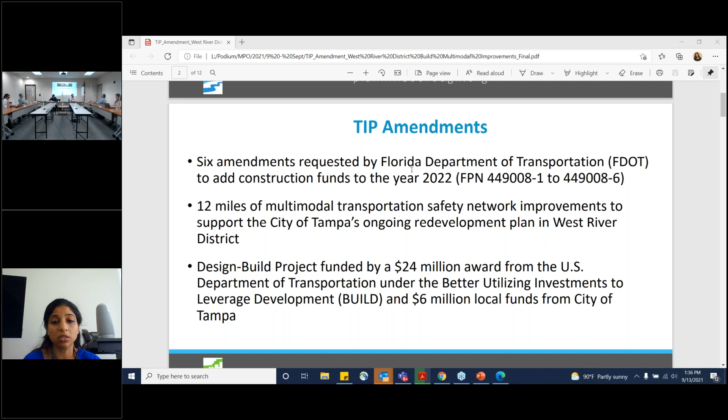I would just like to note that this was awarded as a grant back in 2020, which was a U.S. Department of Transportation BUILD grant. The amount which was granted was $24 million. There is an additional 20% local match, which will be provided by the city of Tampa. So in total, the construction cost is about $30 million, and it will be designed as a design-build project.

I would just like to give you a quick update about the project location. As you can see here in the map, this covers the western side of the river. The project is in different phases, as you can see, 1 to 6, and by that it means that the different phases are the different segments of the West River Walk. This project will help to complete the sidewalk gaps and complete the network.

So I will just go over quickly which are the roads. This mainly covers Rome Avenue, West River Walk, Platt Street, Ridgewood Park, and Columbus Drive. So these are the main corridors that will be included in the construction.

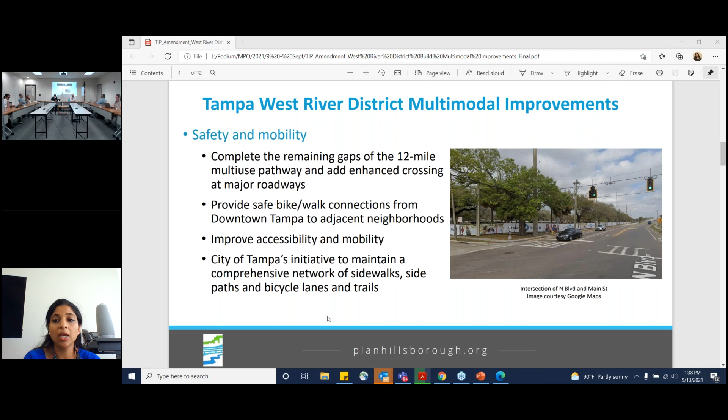Now I would like to go over some of the benefits of this Riverwalk development project. I would like to highlight that this project was mainly meant for the safety and mobility of the people. As I had mentioned before, it would help to complete the gaps of the 12-mile multi-use pathway, thereby creating a separate pathway for bicycles and people separated from vehicular traffic, and it will also add enhanced crossings at some of the major roadways.

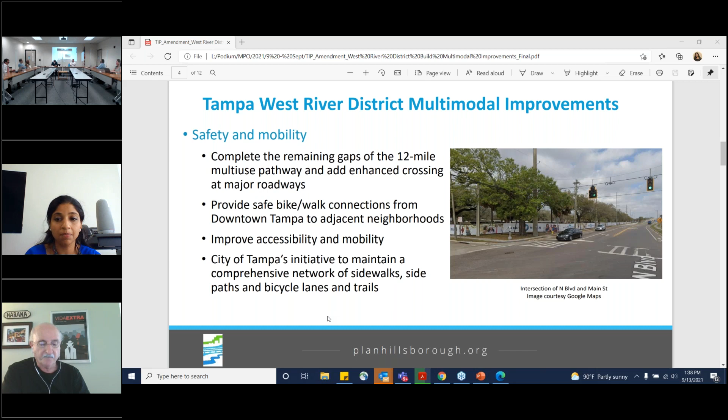This will also provide a safe bike-walk network in this neighborhood, improving accessibility and mobility. This is part of the City of Tampa's initiative to maintain a comprehensive network of sidewalks. There's a map on the right, a Google Map shot I picked up, and I see some sections of the Riverwalk are already being built here. So this will go into that project.

Another important advantage of this project is that it will help build economic growth and provide resilience in the community. Through this grant, once the Riverwalk is completed, it will help bring in more jobs, connect jobs and residences in the area, and increase investment into the opportunity zones. It will also provide a long-term sustainable transportation option, reducing greenhouse gases and giving people an additional mode of walking and biking, improving health and overall air quality.

The design is also such that it will help increase seawall resiliency and mitigate stormwater runoff through living shorelines.

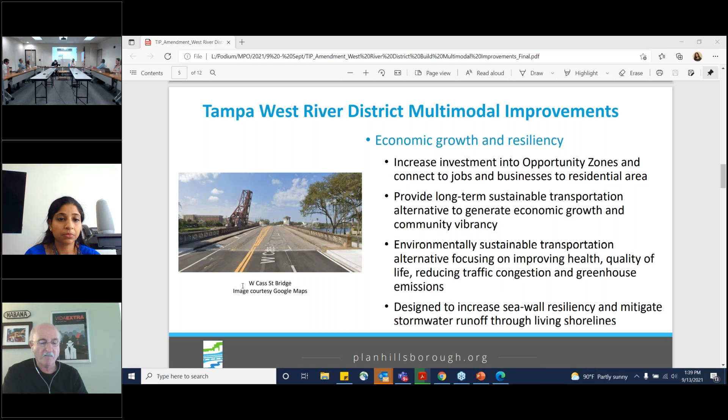I'd just like to give you another quick update about the public involvement. This is a City of Tampa project, but we are just facilitating the amendment process for it to report to FDOT, so most of the public involvement has been happening through the City of Tampa. I believe we have a City of Tampa staff here, but since the grant was awarded back in 2020, they have reached out to the West River District CRA, the Hillsborough River Interlocal Planning Board, Friends of the Riverwalk, and presentations in front of the board, the TPO committees, and other local agencies are some of the other public involvement the city is undergoing.

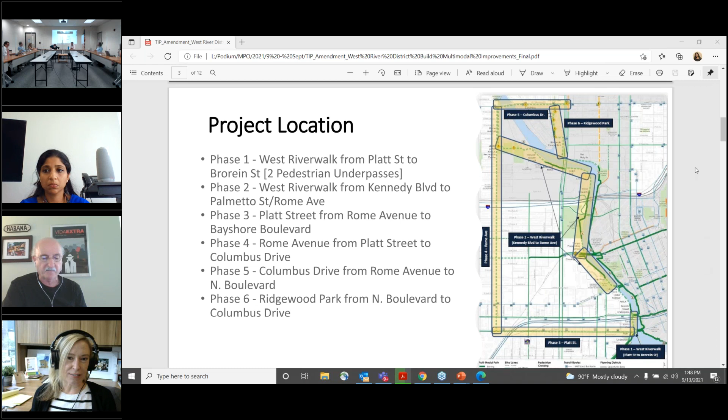As you know, we're at the early stages of concept development and cost estimating. I wanted to preface what I'm about to say with this: this is going to be the 24 million that we received from the BUILD grant from Federal Highway Administration. It's a construction project costing about 30 million.

These segments, not really phases, that you see here - the one Justin was asking about is segment 4, on Rome Avenue. It does include, if you see, it goes underneath the interstate and then all the way down to Rome Avenue.

Am I saying that correctly? Yes. So I think his question was already answered from reviewing this map. I don't know, Justin, if you had anything to follow up with in the chat. I'm good, thanks. I spotted it after I typed it. Okay, awesome, good, thanks. We appreciate the input though.

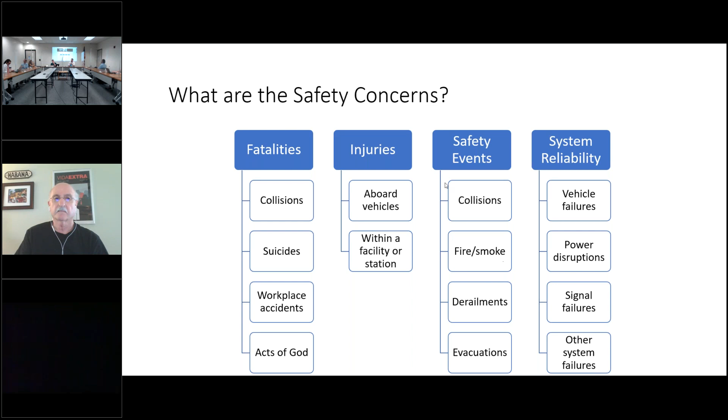I would just like to explain to you the process and schedule for PTASP target setting. There are 3 stages, and MAP-21 originally established the targets in July 2018. It's been over 3 years that we knew we had to adopt it, and it was scheduled to be adopted in July 2019. That was the original intent.

But due to COVID and some other factors, they were also resetting their targets and reiterating some of their measures. That led to such a long delay. And this year we will be adopting it.

So between now and then, the state should have adopted the PTASP target. Unfortunately, the state hasn't adopted it yet, but we do hear that September 30th is the final deadline, which is kind of late in the year, but hopefully from next year onwards we will be adopting it much earlier. So in this process, the MPO and the TPOs must adopt the safety target by September 30, and we will be using that as the year 2021 targets.

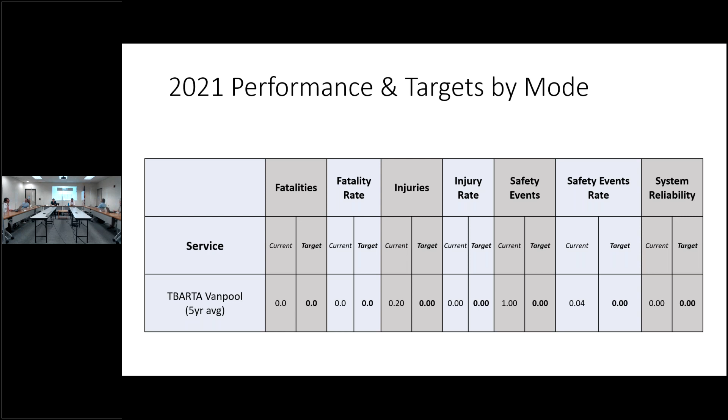With this, I move on to explain the next steps: to adopt the numbers presented today. If the board approves this number tomorrow, we would like to keep this number and report it to FDOT to be transmitted to FHWA. We also would like to develop a performance methodology, as I mentioned before, to evaluate the impacts, and adopt a process that can be incorporated into the TIP and the LRTP in the coming years. That would be the hope for today's presentation. I would request you to approve these safety targets.

If you have any questions, I can take them now. Thank you.

Okay, Vishaka, do we have any questions from the committee?

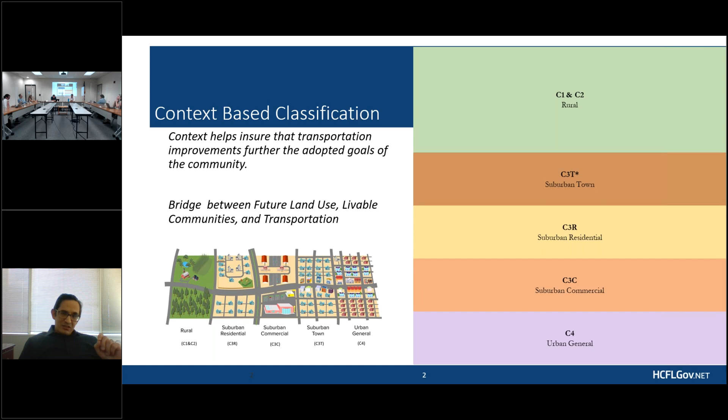But we can't really take the complete streets context-based classification system as far as it naturally should be taken with the resolution of a comprehensive plan. In a comprehensive plan, we can know whether something's rural, suburban, or urban. But what we can't know is whether that rural thing is planned to be a rural activity center, like a crossroads with a school and a church and a corner store, a rural neighborhood, or what we normally think of as rural, like farms and preservation areas.

And then with the suburban, we can't know whether or not a suburban residential area in the comprehensive plan is going to be served by more of a simple suburban residential road with a lot of residential driveways on it. These are your older collectors in the community. Or one of the more post-war suburban neighborhood connector roads that basically serves as a feeder to all the local neighborhood streets. Same thing with urban areas.

You can't really know if it's a main street or an urban area neighborhood through the resolution of the comp plan. So the Complete Streets Guidebook refines that comprehensive plan context-based classification and gives the ultimate designer of the road the ability to understand what it's going to be in the future. I'll give you an example of how this is actually played out by looking at an area in Ruskin on the next slide.

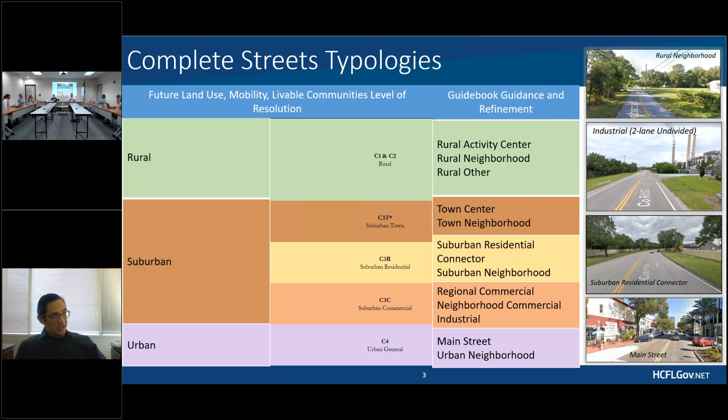So this is the Home Depot on the corner of 674 and I-75. If you guys haven't been, there's a great German restaurant in that shopping center. I hope it's still open. So this all has, if we click through to the next thing, it all has the same land use.

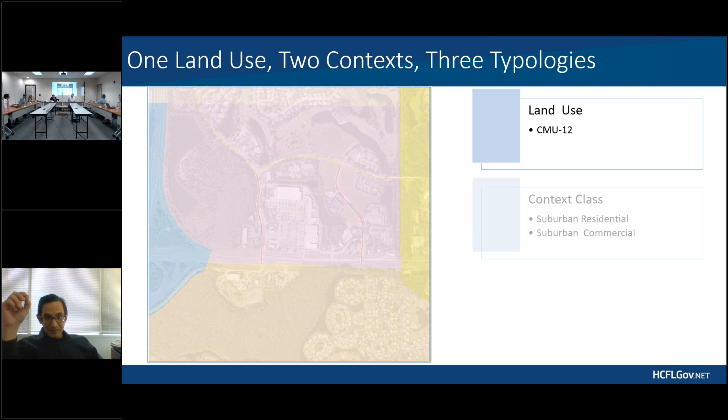It's CMU 12. And if you look at the functionally classified roadways in there and assign them a context classification, if we click to the next thing, you can know that one of those roads going through there is suburban residential, and two of them are suburban commercial. Then there's all kinds of other things you can look at in terms of the CMU 12 and know that it's suburban and not urban because of the way growth is planned in the area, but that's a longer story. And then, but what type of suburban commercial is that?

Suburban residential, you can see it's a classic suburban connector, but the suburban commercial, there are two different things going on there. One, when you're closer to I-75, that road on the left is a regional commercial road. That's the Home Depot. It's the big box shopping center that's serving a huge market area. The road on the right, further from I-75, is a neighborhood commercial road. What you see on that road are small, basically dental, minor medical offices, sole proprietor type things, where it's more of a park-once area and serves a smaller market area than the Home Depot, obviously.

So that's what the context-based classification system evolves into the Complete Streets Guidebook. And Paula's going to go into more on the Complete Streets Guidebook now. Thank you.

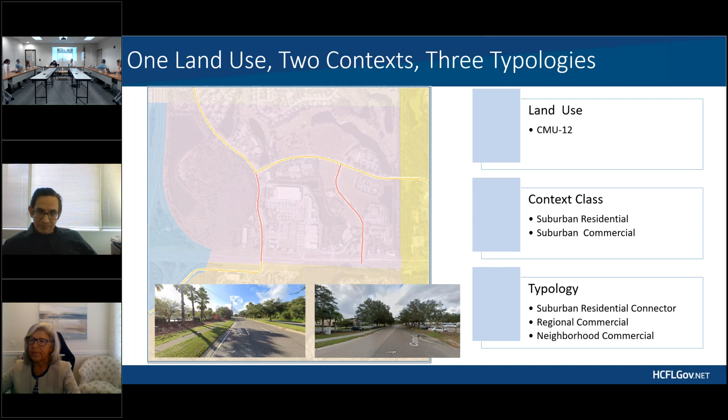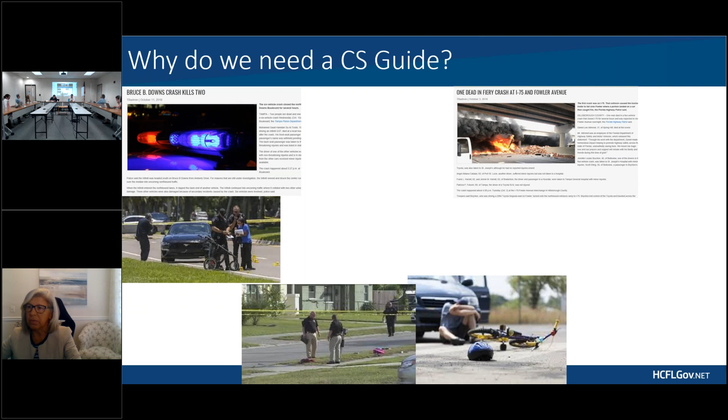So you may be wondering, why do we need a Complete Streets Guide? Why is this so important? So transportation networks for people, for walking, for riding on a bike or even a scooter or taking a bus are very complex. And as our region continues to grow, the demands will continue to grow, and so do the challenges of this additional growth that will bring, including safety, congestion, environmental, and even health concerns.

So this guide is going to provide a new approach to providing more transportation choices, that safe streets, connected networks that will encourage more walking, rolling, and eventually reduce carbon emissions and ensures healthy outcomes for all while providing a much better built environment in Hillsborough County.

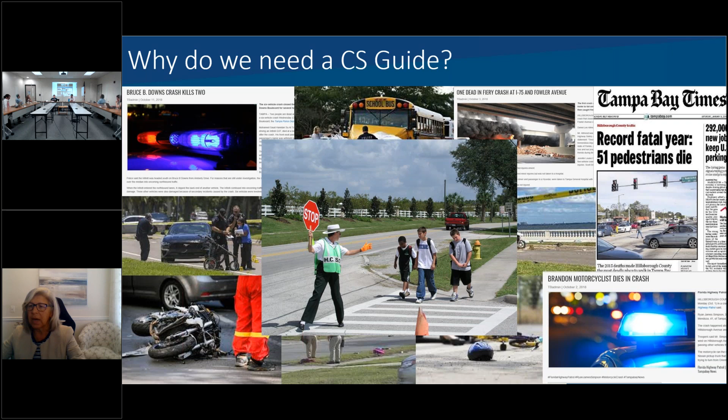The introduction chapter sets the stage for the entire document by truly articulating the purpose of the CS Guide and how it relates to the mobility elements of the comprehensive plan. It defines complete streets. For example, a complete street is where the entire right-of-way is planned, is designed, and is operated for all modes of transportation and all users regardless of age or ability. But there is no singular design prescription for complete streets. Each one will be unique and should respond to its community context.

People are also at the heart of Complete Streets approaches, right? So the guide embraces design as a tool to advance the health and safety of the community while promoting sustainable transportation options and vibrant public places. So this chapter also outlines health, equity, safety, mobility, environmental, and even economic benefits. So to ensure the outcomes promised in the Hillsborough Comprehensive Plan can be delivered, the following principles work together to deliver a very safe, healthy, and more equitable street system.

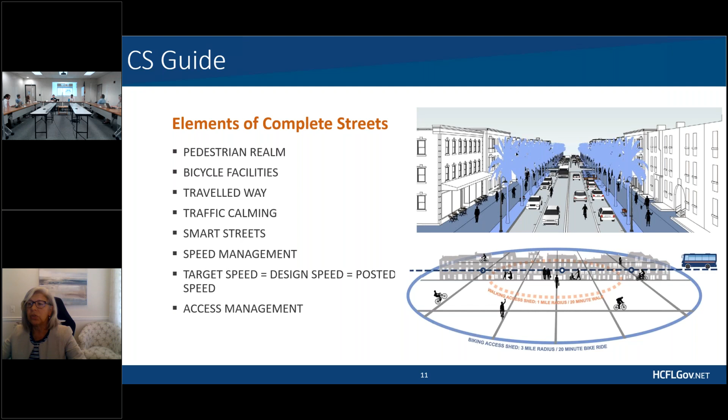So here are some of the graphically representative elements outlined in this chapter. Look for a lot of new items typically not seen in Hillsborough streets, including traffic calming treatments such as curb extensions, raised pedestrian crossings, median refuges, speed cushions, and a lot more. There are a variety of safe intersection control options such as protected intersections, roundabouts, and even traffic circles.

This chapter also talks about road diets and lane narrowing or repurposing of street width, which is a major consideration for constrained conditions. And the chapter also informs on the need for pedestrian and bike-friendly wayfinding that tells people how far and how long it takes to get to their destination by bike.

Another point to look for is that the guide itself is very graphical in nature. It provides great visuals from national best practices by FHWA, from NACTO, from ITE, and other communities, and even some regional Tampa Bay examples.

Chapter 3 is about placemaking and its connection to health outcomes. It contains guidance and informs design on the importance of creative placemaking, the elements for a street that will improve aesthetics, livability, walkability, and quality of life. So making streets and roads convenient and comfortable is essential in encouraging and enabling more people to walk, ride a bike, or take transit for a lot of shorter trips. This is the central aspect of street design that assists in mode shift.

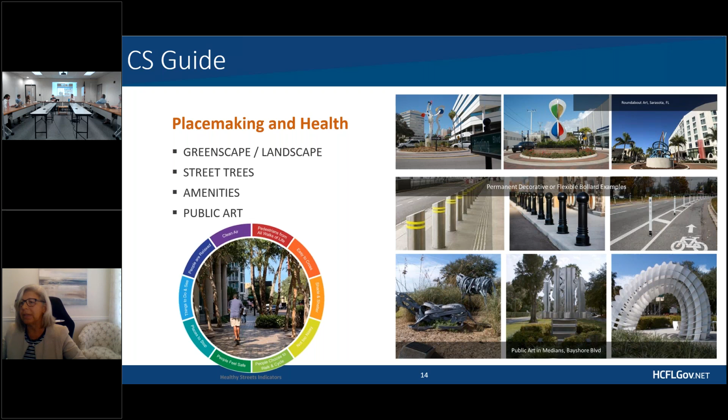The chapter provides guidance on how public art can be integrated as gateway features, the use of lighting and banners in town centers, or the use of painted intersections and crosswalks, the use of art in roundabouts, and even the importance of building murals to activate space.

Chapter 4 is the street typologies, and they're illustrated for each of the rural, suburban, and urban contexts. Each of the typologies is unique to the level of intended users, function, and context. For example, the neighborhood commercial typology shown portrays a corridor where small local businesses such as hairdressers, convenience marts, and restaurants can support adjacent neighborhoods. So the typologies have different elements for each mode of travel.

For example, each element is classified as high priority, shown in dark orange. There are lower priority elements in light orange, and even some typologies show optional elements. Amenities such as lighting and benches are also shown appropriately for each typology. In addition, the target speed range, for example in this instance 25 to 35 miles per hour, shown at the bottom center, is based on national best practices for each context.

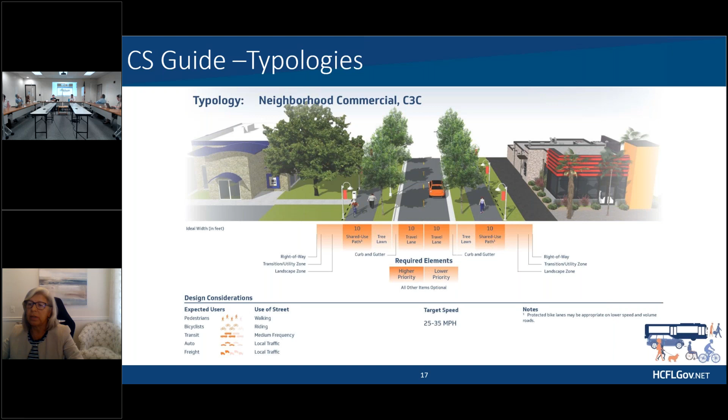With each of the typologies, a summary table is also provided on various desired characteristics. For example, this is the rural C1, C2 summary table that illustrates all the considerations such as user features, travel zone, pedestrian zone, bicycle facilities, transit, traffic calming, speed management, placemaking, and even building form.

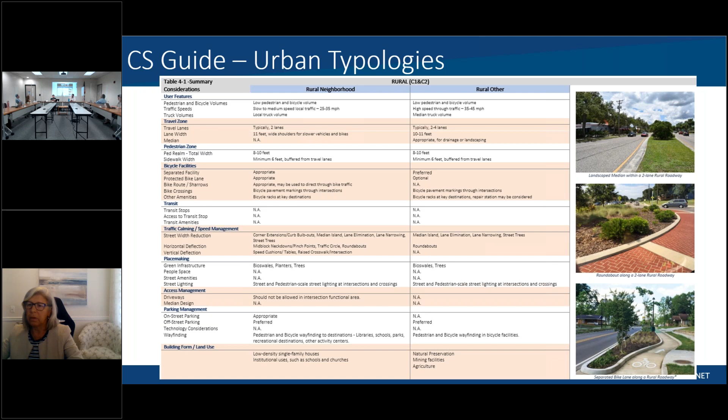So I'm going to now flash through. There are 11 different street types that have been identified in this guide.

For example, there are 2 typologies for the rural context on the left side of the slide. In a rural environment, the street elements are few and minimal to preserve the rural nature of the adjacent uses, but still provide the basic elements for each travel mode.

For the urban context, C4 on the right side of the slide, there is a drastic change in context and uses versus the rural typology. So in urban C4 environments, look for more user-centric elements and placemaking that respond to the higher levels of vulnerable users.

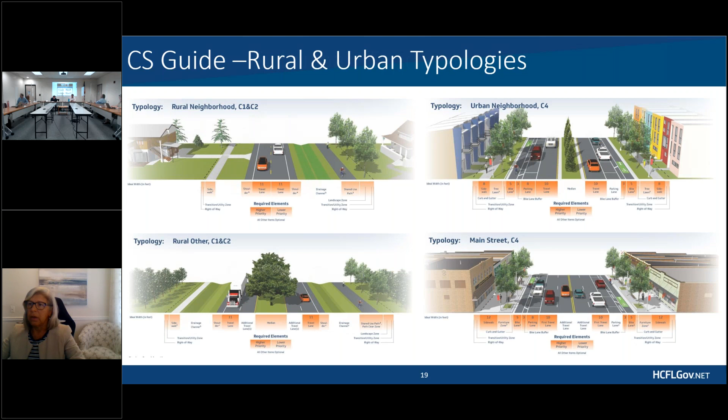For the suburban context, there are 2 residential typologies shown on the left side of the slide, and then there are 2 town typologies on the right side. Again, each typology categorizes different accessibility functions related to the adjacent uses and different levels of users.

For suburban commercial, there are 3 typologies identified with different street elements, and these streets may contain local commercial establishments or regional big box or strip center commercial or even industrial uses.

So planning and designing new streets or roads is easy. However, this guide provides ample flexibility to retrofit existing streets where right-of-way may not be available to include all the elements identified.

Adding multimodal facilities is not an optional element, as multimodal facilities are what is missing on most roads. But when faced with limited right-of-way, one or more of the following strategies can be used to make room for the needed multimodal facilities, such as reducing lane widths or lane narrowings, reducing number of vehicular travel lanes such as road diets, removal of on-street parking, or only provision of parking on one side of the road.

So design professionals should evaluate trade-offs to come up with the feasible solution that best accommodates all modes of transportation.

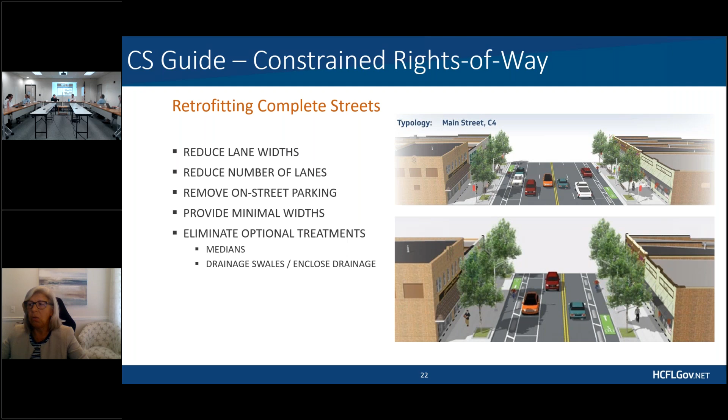Chapter 5 is all about intersections and mid-block crossings. Intersections are the greatest source of conflicts for all modes of transportation in Hillsborough County, and they also represent some of the greatest inefficiencies and inconveniences found in today's street network. So intersections should be designed to maximize the safety of all users, not just vehicles.

This chapter covers most of the critical elements at intersections. Look for guidance on crossing types and frequency, how often you should put crossings. Look for guidance under the geometry section that talks about the impact of curb radii, for example, on speed and pedestrian safety. Look for the importance of breaking up long crossing distances with pedestrian refuge islands. Or look for traffic signal control principles that optimize safety, prioritize multimodal and vulnerable users, and assist with speed management.

Chapter 6 is about integrating transit in our streets. Public transit serves a vital transportation function for many people. It is their access to jobs, to school, to shopping, to recreation, and many other daily functions. And nearly every transit trip begins as a walking trip.

But the disconnect between transit and road planning means transit riders are often left to wait at bus stops marked by a lone post in the grass. So for transit to provide optimal service, streets must accommodate transit vehicles as well as adequate and safe access to the bus stop locations and stations.

While it is expected that Hillsborough Area Regional Transit, or HART, will specify transit services, shelters, and other amenities for a given corridor or stop, it is the responsibility of Hillsborough County to contemplate the planning and design of the bus stop locations and provide adequate pedestrian and bicycle access to them.

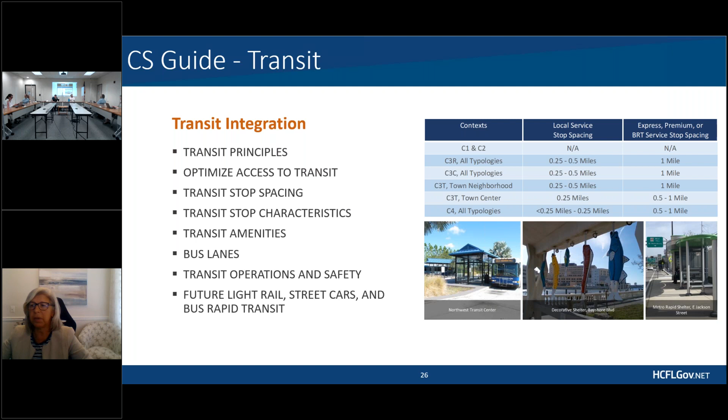In addition, the transit integration chapter shows options for bus lanes or BRT lanes, illustrated in this chapter. The CS Guide design flexibility can easily adapt transit corridors through lane conversions, eliminating travel lanes, or removal of medians to accommodate transit.

So the Main Street typology, for example, shown on the bottom left, could resemble the transformation of Nebraska Avenue, or the C3 regional commercial typology on the bottom right illustration could resemble the transformation of Big Bend Road in South County.

Chapter 7 is about a few other considerations. These include how to accommodate and address emergency vehicles, implementation, tactical urbanism or what you sometimes refer to as quick builds, maintenance, adoption of the guide, and even some potential regulatory changes and requirements.

So to conclude, the Complete Streets Guide is intended to inform and assist a wide variety of local government officials, planners, designers, stakeholders, and even decision makers about incorporating complete streets elements.

The guide was developed consistent with a variety of national, state, and local street design guides that include FHWA, NACTO, National Coalition for Complete Streets, while also incorporating best practices from leading municipal complete streets guides from a dozen other locations such as Miami-Dade, Boston, Deerfield Beach, Montgomery County Maryland, Fort Lauderdale, etc.

So institutionalizing these best practices will ensure we will build back a better transportation network for generations to come.

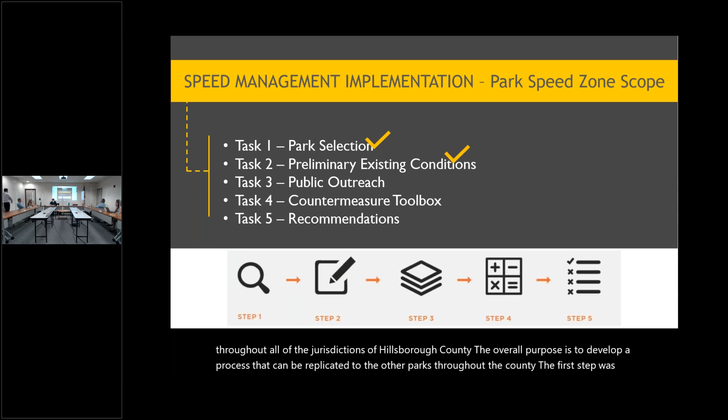So this is a pilot project, but it's going to represent - we budgeted for 3 different park types throughout all of the jurisdictions of Hillsborough County. The overall purpose is to develop a process that can be replicated to the other parks throughout the county. The first step was to identify which parks to include in the analysis. With over 440 parks in Hillsborough County and its 3 cities, we needed to have a transparent and equitable process in the park selection. Once the parks were selected, we've completed the preliminary existing conditions assessment.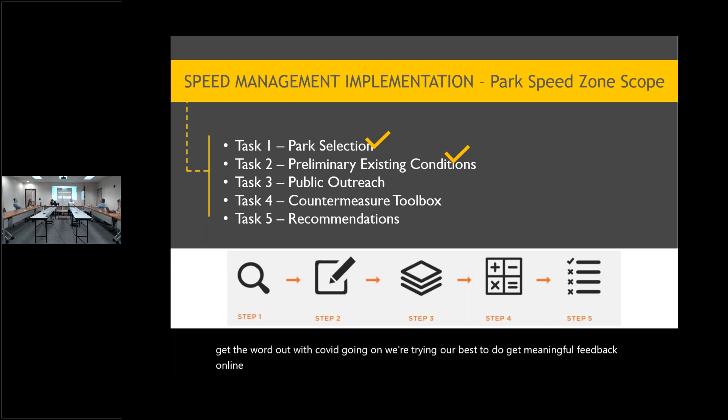And so we've hit tasks 1 and 2, and I'll be sharing the highlights of those today. We have also kicked off the public outreach process and would love for you guys to help us get the word out. With COVID going on, we're trying our best to get meaningful feedback online in low touch situations. And then, as I mentioned, the final step is to develop the countermeasure toolbox so that we can have specific things for the unique characteristics of each location.

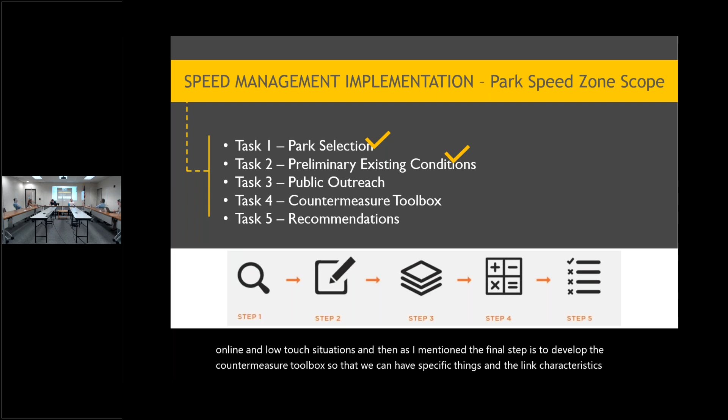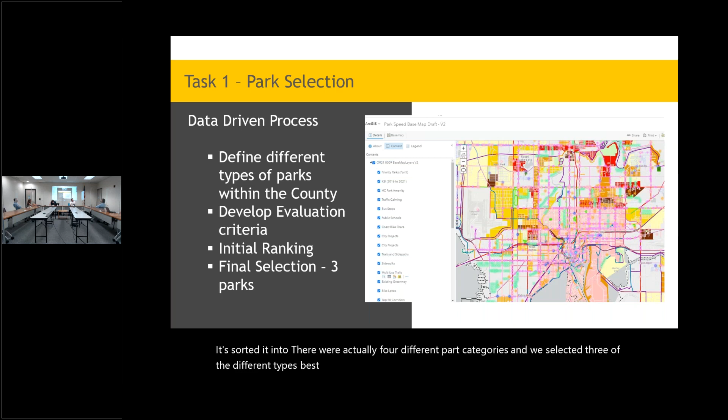All right, so when we went through the park selection, there was a lot of data, a lot of parks, so we sorted through all of that. We sorted it into - there were actually 4 different park categories - and we selected 3 of the different types and made sure that we had a very diverse range of contexts.

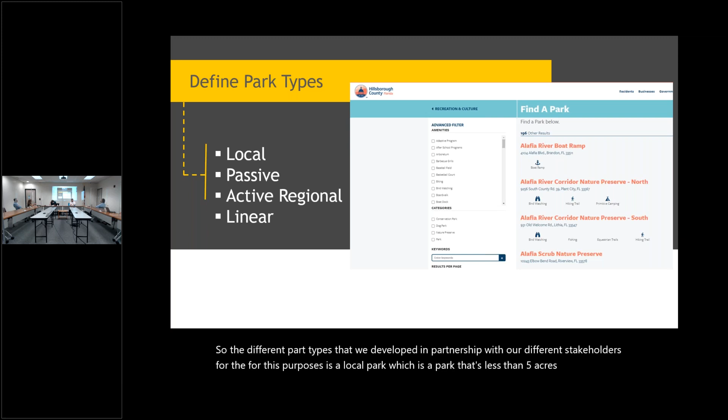So the different park types that we developed in partnership with our different stakeholders for this purpose: a local park, which is a park that's less than 5 acres. It's typically adjacent to residential. People more often bike or walk to these parks, and they typically include play structures, picnic tables, shade structures, and benches. There are approximately 200 in our data set.

In the passive regional park category, these were larger than 5 acres. There are no program activities or staff. There are more conservation kind of areas. You might think they'd be mostly in rural areas, but they did - there are regional passive parks in all settings throughout our community. So bus service is typically not provided to this type of park. There were approximately 115 in this category.

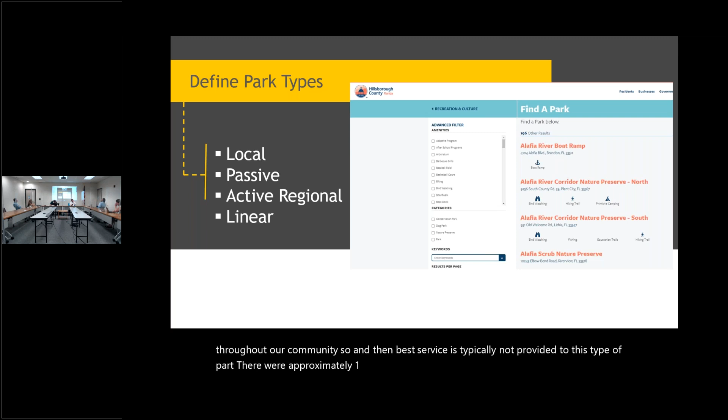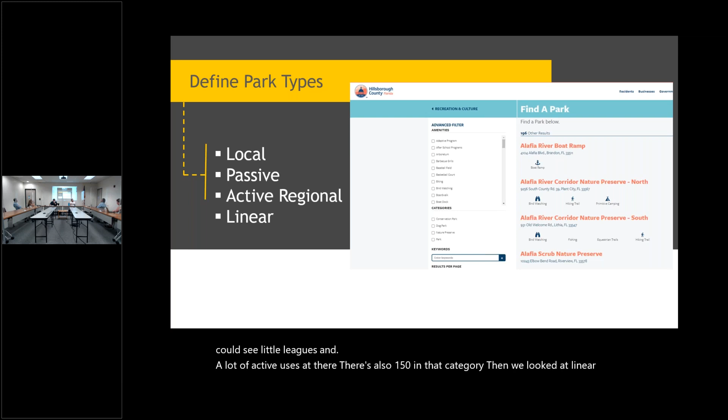Active regional parks are parks that are larger than 5 acres, but do have those programmed activities. You could see little leagues and a lot of active uses there. There's also 150 in that category. Then we looked at linear parks - these typically follow some kind of natural feature like a shoreline or waterway.

Bayshore Boulevard Linear Park is one of our most prominent in the area.

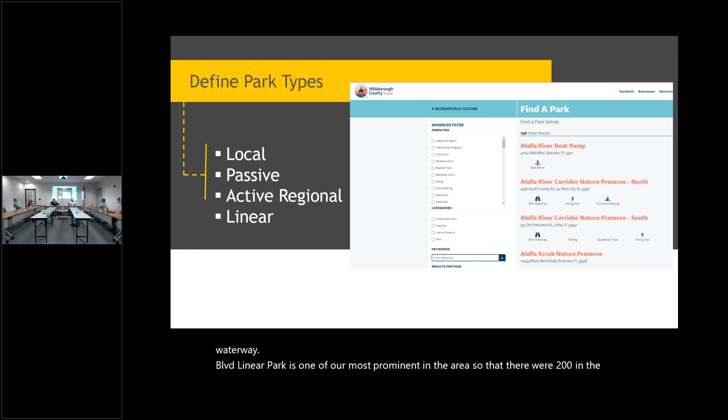There are 200 parks in the unincorporated area, 195 in the city of Tampa, and 23 each in Temple Terrace and Plant City.

So then how do we select the parks? We went through an evaluation criteria. We developed 9 different categories, including equity, safety, and other. Then we applied weighting to each of those.

As you know from our non-discrimination plan update, we have a strong commitment to equity. So we weighted equity with 40 points, weighted safety with 40 points, and gave 20 to the other criteria. In the interest of time, I'm not going to go into all of them, just hit some highlights.

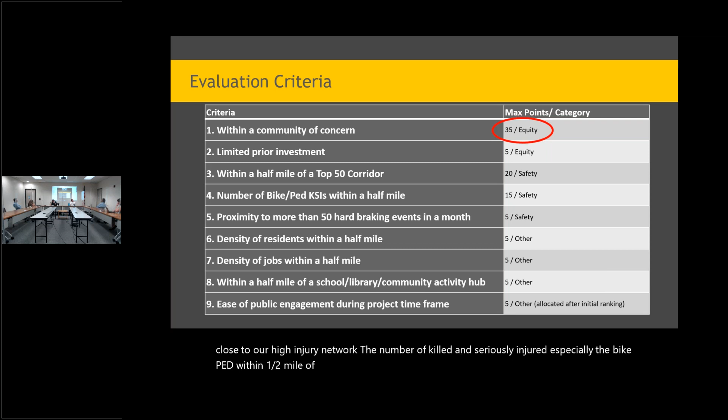We used our communities of concern to help with equity. We looked at where investments are coming, and things close to our high injury network, the number killed and seriously injured, especially bike-ped, within a half mile of a park, proximity of hard braking events in a month, density of residents and jobs, and close proximity to another community asset like a school, library, or activity center. And if a park were closed but ranked high and we weren't able to do public engagement, we moved on.

So which ones did we select? In the local park selection, we went with Sulphur Springs Park. You can see Burrell had a few more points, but it had some challenges, so Sulphur Springs was seen as a better option.

Plus we kind of got a twofer here because River Tower Park is a regional park and it's adjacent, so our consultant is looking at both parks collectively.

On the active regional park, Copeland Park was selected. University area park received a couple more points, but there have been a lot of planned and already underway improvements to the university area, and none at this time for Copeland Park. So we're seeing this as avoiding repetitive or duplicative efforts.

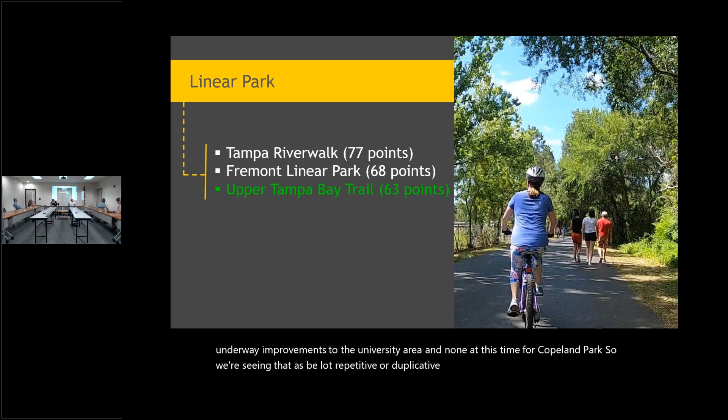The linear park was a smaller category. The river walk was oddly ranked a little higher on this, but it's a special area, so we looked at what else is in this category. Fremont Park was in there, but it was only a quarter of a mile long, so it didn't have any different context. Again, this is a pilot study to develop so we can apply this to other parks.

So Upper Tampa Bay Trail was selected. It's very long and goes through rural, suburban, and urban context with a lot of variety of different crossings.

Okay, so existing conditions. We looked for examples, nationwide best practices. There's not a lot of park speed zones out there, but we are studying those that exist. And there's a lot of great information in the existing conditions reports. They're very detailed and thorough, and they're posted on the website.

Since you are the technical advisory committee, you might actually love to see that. Some of you were at the stakeholder meeting last week and got to go over this, but some were not, so I'm putting a plug in to go check those out. I'd especially love to hear from you city folks if there's anything going on in and around Sulphur Springs or Copeland Park that we should be aware of in our efforts.

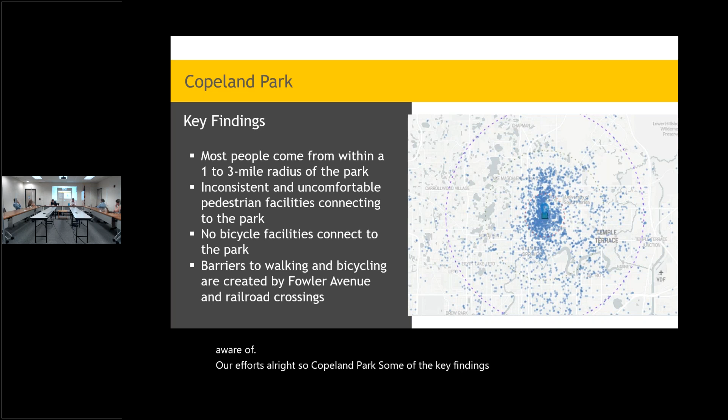Copeland Park, some of the key findings - this is kind of interesting. You can see the cell phone data of where people are, where their phones live at night and where they travel to and from during the day. It's all anonymous, but we used that to help us understand where people are traveling to and from the park, within a 1 to 3 mile radius.

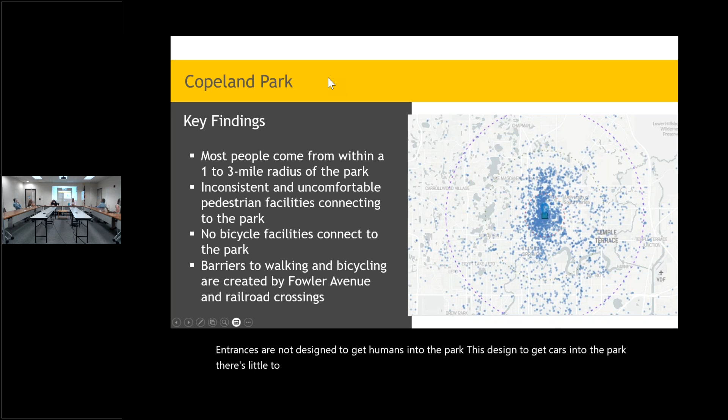There is inconsistent and uncomfortable pedestrian facilities all around this park. Even the entrances are not designed to get humans into the park, just designed to get cars into the park. There's little to none bicycle facilities, and some extra barriers created by Fowler Avenue and the railroad track. On Sulphur Springs, you can see it's got a different density, so there's a lot.

This is the largest walk-up park in the city of Tampa, and you can tell that by the data. So that's more of a 1 mile radius. And again, very inconsistent and missing pedestrian facilities and bicycle facilities.

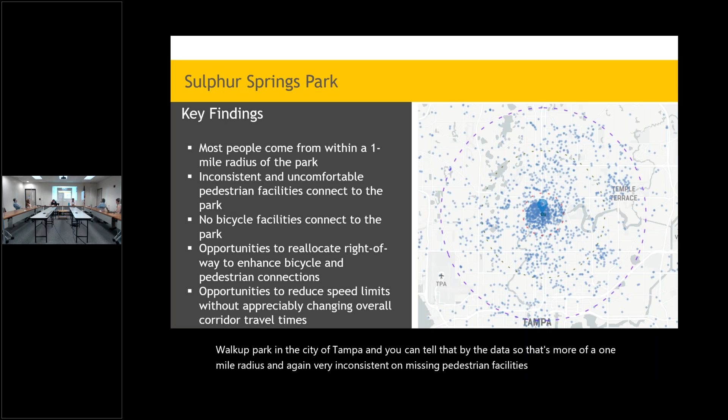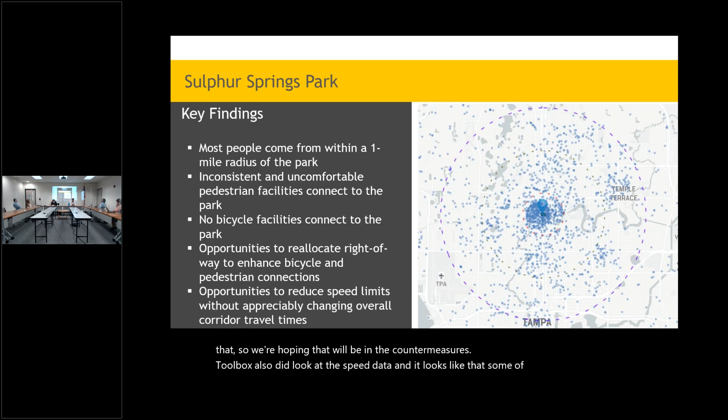We did look at some creative opportunities to reallocate some right-of-way to enhance that, so we're hoping that will be in the countermeasures toolbox. Also did look at the speed data, and it looks like some of the speed limits can be reduced.

Without changing travel times. On Upper Tampa Bay Trail, it's way less dense. It's definitely a regional park with people driving to and from the trailheads mostly, although even the trailheads aren't designed with great access for the non-motorist type. So a lot of opportunities to improve that, a lot of maintenance things that we have observed.

And then also some of the major roadways and lower speed roadways around there, looks like maybe we could propose some engineering solutions for speed management.

Okay, we are in the public outreach feedback stage, so I expect all of you to go online and complete the interactive map and survey. We have both options, so if you're very visual, you can do the interactive map. If you just like to answer some quick things and type in your issues, great. The interactive map will even let you take photos of the problem and upload it directly into our input. It's in both Spanish and English.

Let's see, then, oh yes, Wade Reynolds has the university area trail alignment study going on, so we're doing some companion initiatives that way. And then later in the phase, we'll be following up with our countermeasures to get some more feedback.

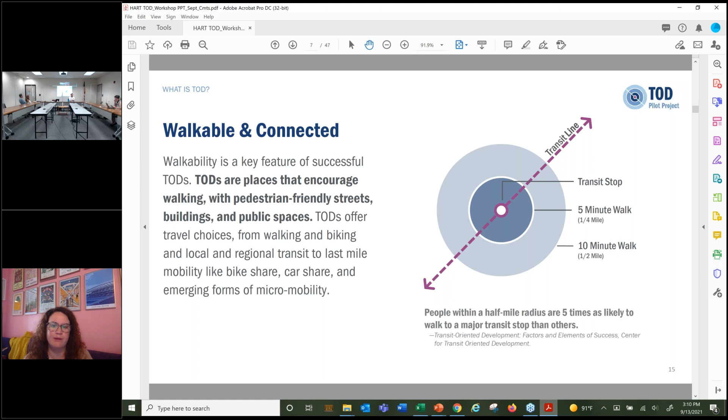As far as what is TOD, many of you are already familiar with the concept, transit-oriented development, looking at how to capitalize on the access with enhanced transit. A strong focus of this is walkability and activity, looking at first mile, last mile solutions, and ensuring there are different opportunities for mobility - bike share, car share, and micro mobility - as those come to our community.

As far as where they are with the study, the consultant has put together the context assessment, looking at existing conditions, as well as the briefing book, with updates as the study continues.

We are working in conjunction with other efforts along the corridor. The HART Arterial BRT, or Bus Rapid Transit Study, has been moving along in conjunction with this, again looking at conditions and improvements along the corridor, as well as the Tampa Streetcar extension - the modernization and extension to Palm Avenue along Florida and Tampa Street.

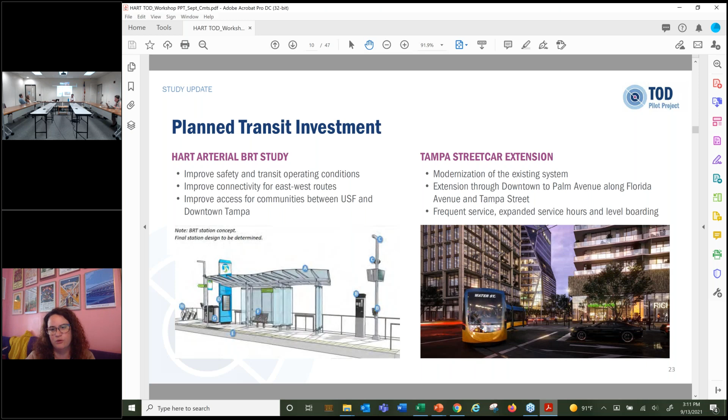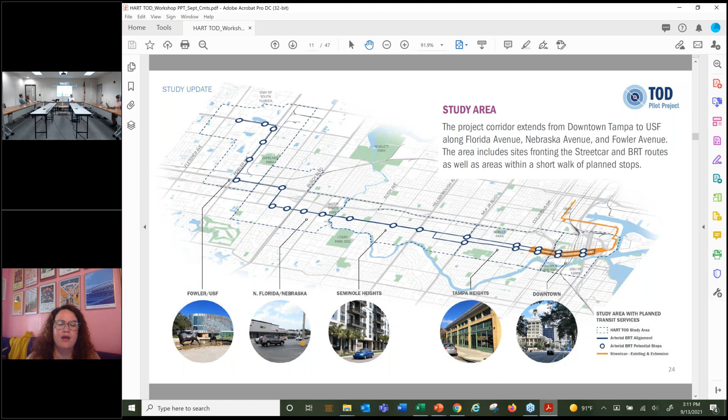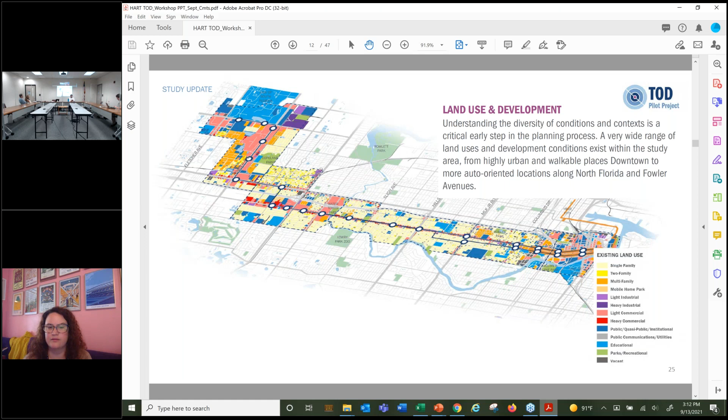There is the opportunity with the existing retail spaces that do front Florida Avenue, so looking at maintaining that and opportunities along there, as well as the north of the river area where we have Water Street and some of those bigger areas, the old dog track and such, that could possibly be redeveloped as well.

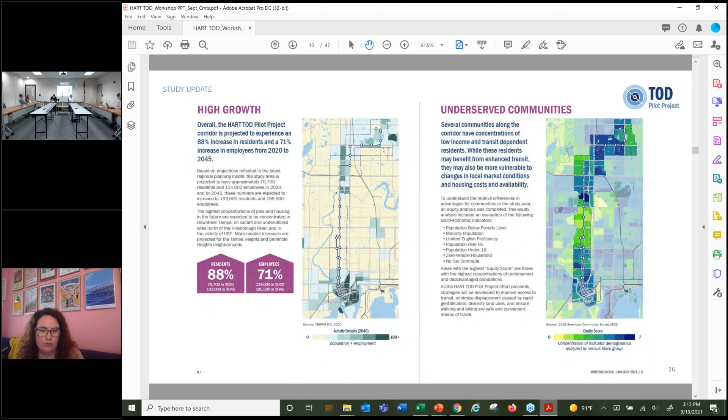The southern and northern portions are expected to see a high growth rate, so there's a lot of opportunity to make sure we can have these policies in place as those areas do redevelop. This is also a large portion of the underserved communities, in that northern and southern portion of the corridor.

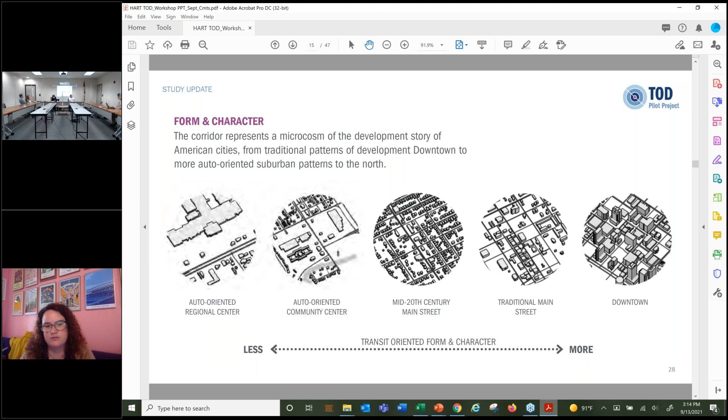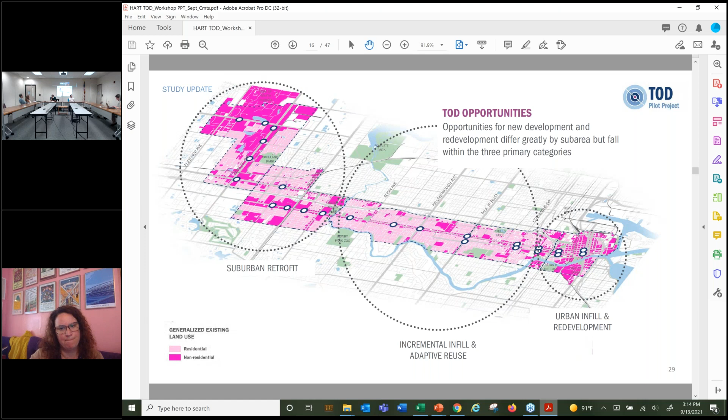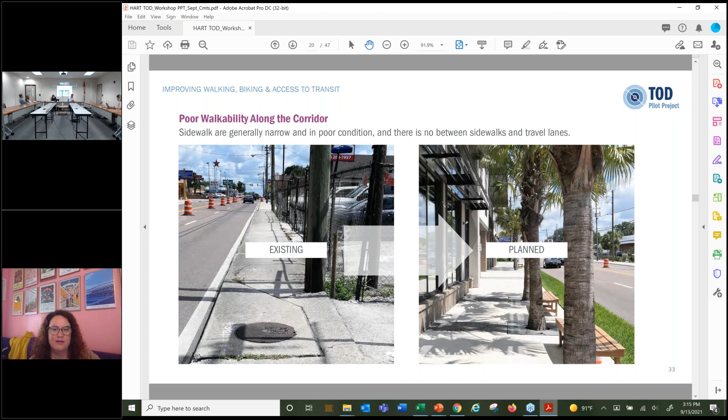As far as improving walking and biking conditions, these are two pictures taken virtually across the street from each other, along Florida Avenue. This shows largely the existing conditions where you see the narrow sidewalk, no buffer between the roadway, gates limiting the width of the sidewalk. Then there's the new development across the street where the building was pushed back slightly to allow for wider sidewalks, buffering between the street to provide safety, as well as opportunities for landscaping.

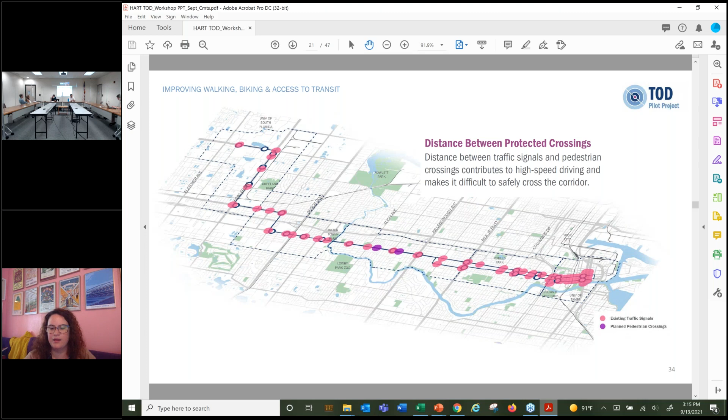As far as strategies, they looked at exploring speed management and signal timing. The TPO has worked hard on the speed management plan, so being able to implement some strategies from that, looking at additional opportunities for more mid-block crossings, improving the markings and lighting that are there today, and also streetscape and shelter improvements for the BRT stops.

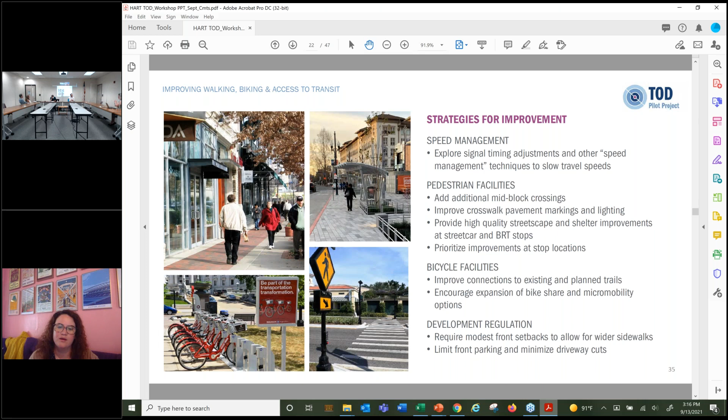The bicycle opportunities include improving connections to existing and planned trails, something we've been looking into with previous studies, as well as the expansion of bike share and micromobility options. As far as development regulation, require modest front setbacks to allow for wider sidewalks, as well as limiting front parking and driveway cuts.

As far as strategies that can help address the affordability issues along the corridor, we're looking at different programs that can be operated locally to build or maintain affordable housing, looking at some regulatory options as well. There are also ways to streamline the review process for implementing affordable housing, and looking at different funding sources that might be available through different programs, as well as tools that garner partnerships that would allow for additional affordable housing.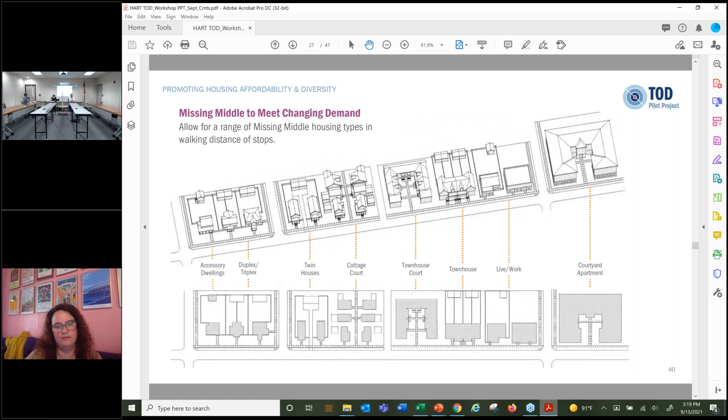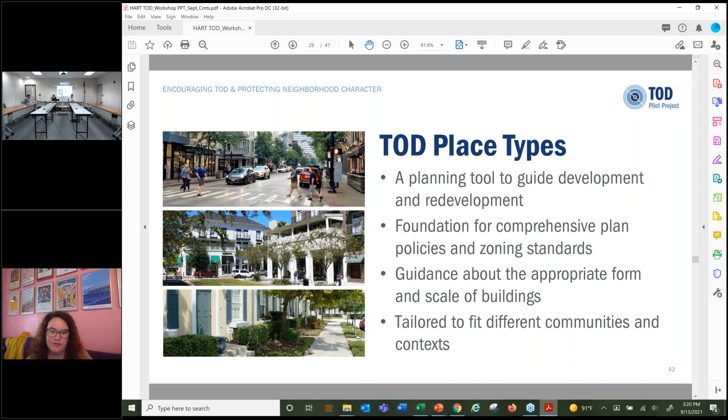As far as looking at the developed and underused areas, as well as redoing some of those auto-oriented sites, these go through the TOD place types that have been developed as a planning tool, especially as redevelopment comes through. They can be used as foundations for the comprehensive plan policies and additional guidance on the appropriate form and scale of buildings to help with the context of the communities.

So these are the different TOD centers that were developed, as well as looking at the corridors in between the stop locations. We'll go through each of these.

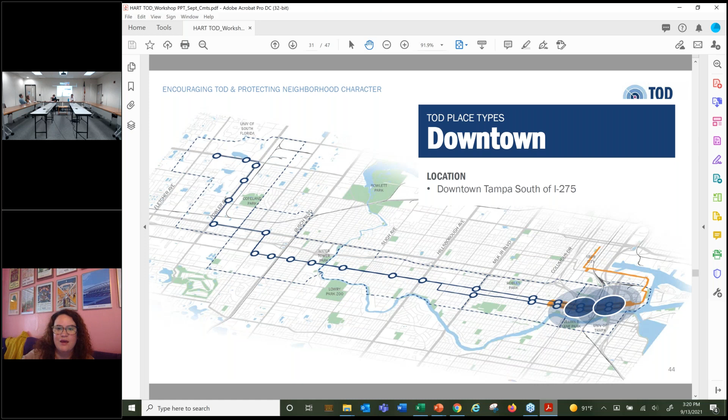First, the southern portion, downtown, is the most transit-rich portion of the region, with continued infill and redevelopment, the highest density, regional employment centers, as well as entertainment, sports, cultural, and education events occurring down here a lot, looking at mixed uses of office and residential, as well as building forms. We have tall buildings with structured parking, active storefronts, and more walkable streets with streetscapes.

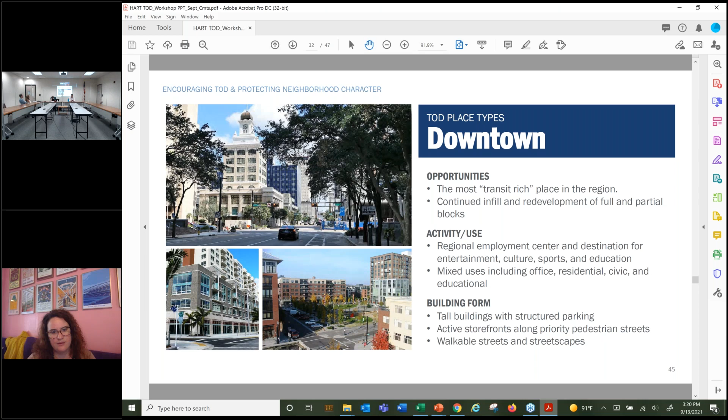The next is our urban centers. This is looking at Palm Avenue, then there's also the suburban retrofit of Waters Avenue and University Mall, as well as the employment intensity of USF and the VA.

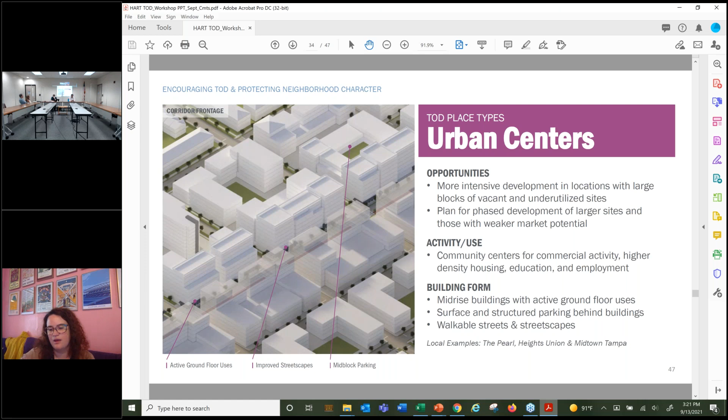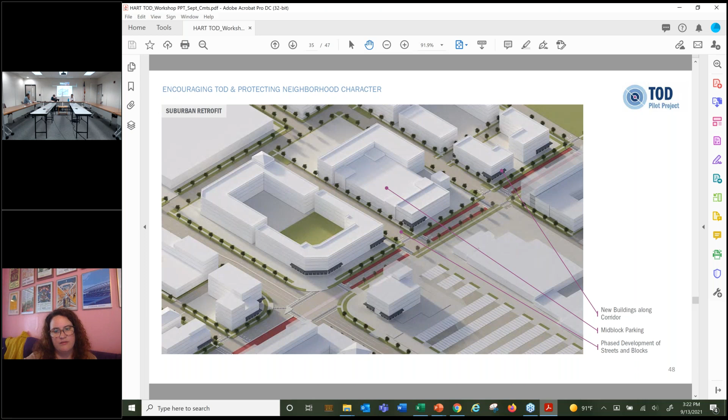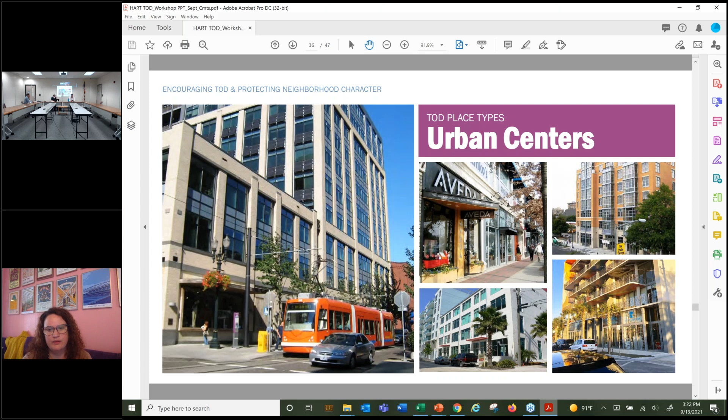This is looking at what can be done for the suburban retrofit, looking at Waters, as you see new buildings along the corridor, mid-block parking, as well as phased development of the streets and blocks. These are just some examples of what are considered urban centers, mid-rise buildings and active storefronts, and walkable streets.

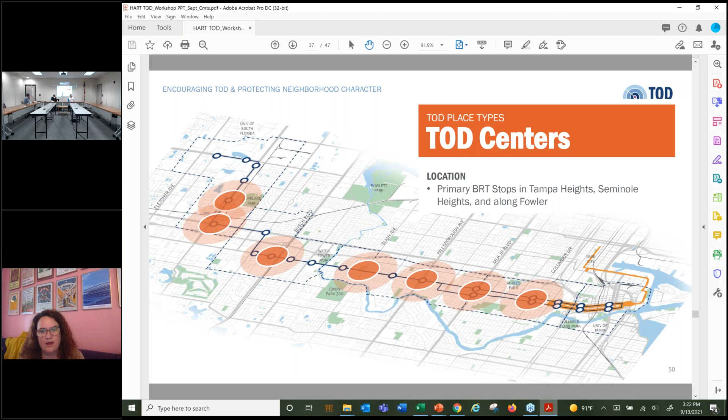The TOD centers are looking primarily at the BRT stops within Tampa Heights, Seminole Heights, and along Fowler. These are just some ideas of what can be considered TOD centers, a little less intense in building height, but still with active street storefronts and streetscapes.

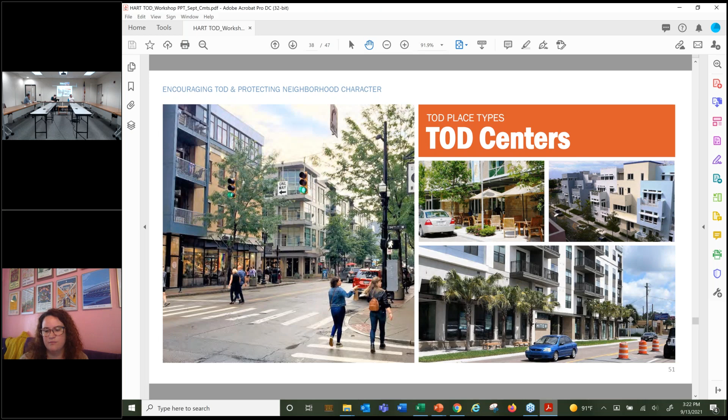These are looking at infill opportunities along the primary stops, looking at community centers and activities of higher density. This also includes the missing middle in housing. As you get off the street fronts, the housing intensities transition as we move further from the corridor. The street form is again 3 to 5 stories aligned along the sidewalks, all those sorts of things.

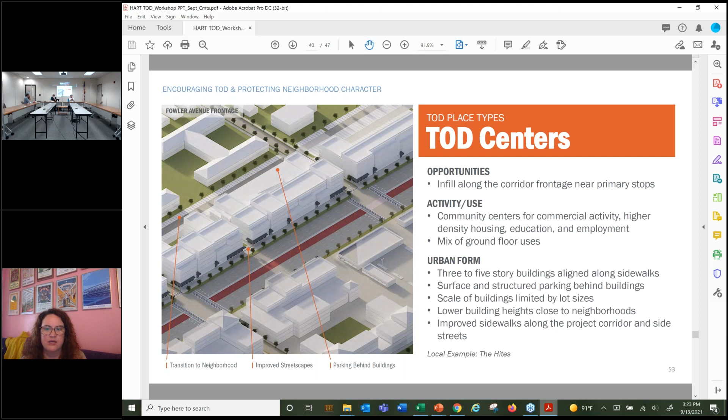This is looking at the opportunities along Fowler Avenue, again fronting along the street with parking structured in the back, and again 3 to 5 stories, lower building heights, all those.

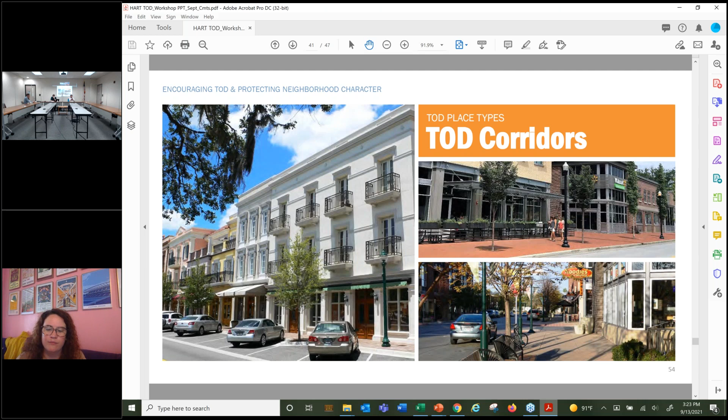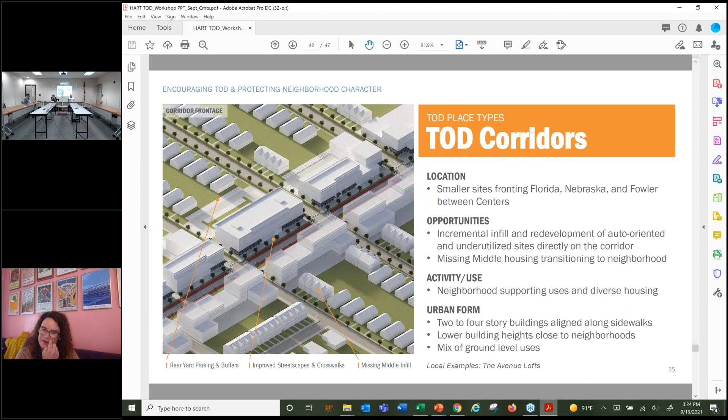Then we get into the TOD corridors. These are the sites in between the stop locations, largely in the Seminole Heights area and Tampa Heights, looking at the Florida, Nebraska, and Fowler corridors. They have the opportunity for incremental infill and redevelopment on auto-oriented underutilized sites, the missing middle, to transition between the neighborhoods behind the corridor, looking at neighborhood-supporting uses and diverse housing. These are less intense, 2 to 4 story buildings along the sidewalks with lower building heights and a mix of ground uses.

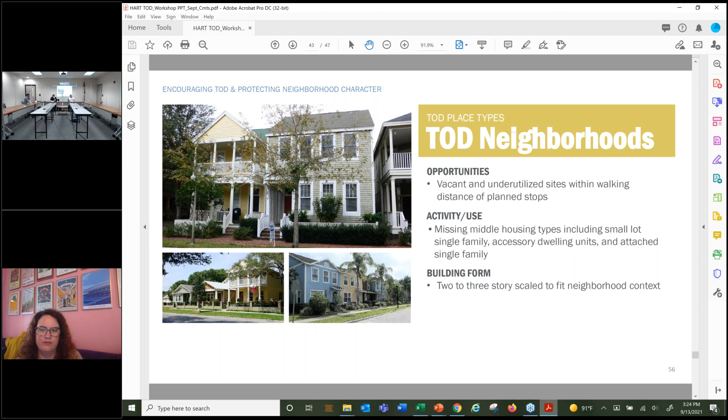And then we have the TOD neighborhoods. These are where we look at mostly just residential, again the missing middle that can be implemented here, the addition of townhouses and such with less intensity. So these are the stop locations that we just discussed.

As far as next steps, the consultant is working on refining these strategies and recommendations. We are planning a workshop with Planning Commission members as well as the TPO committees. We'll finalize that date soon and make sure you have that, and we'll notify you before it occurs. We're looking at late October, possibly early November.

The consultant will be holding a series of workshops as well that'll focus on the Palm Avenue station. Again, those dates are being determined, also in late October. They plan to finalize everything by the end of the calendar year, and then hand it off to the Planning Commission, where we'll work on refining some of the policies in the comprehensive plan.